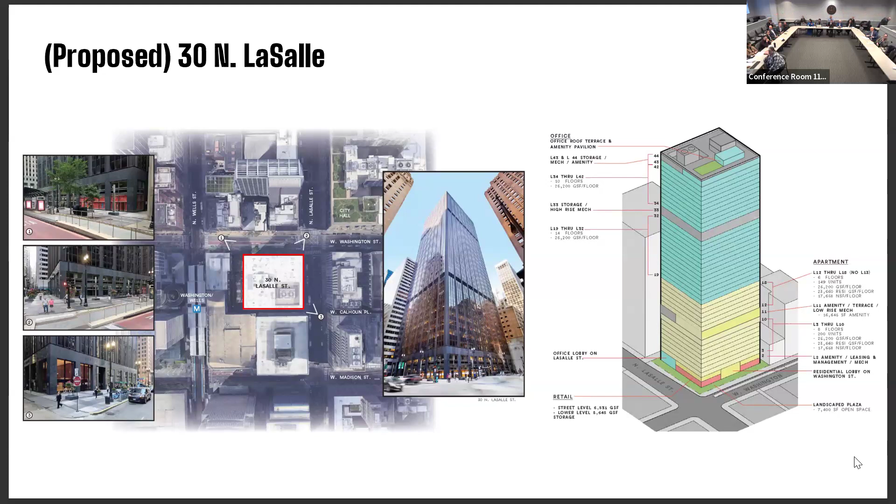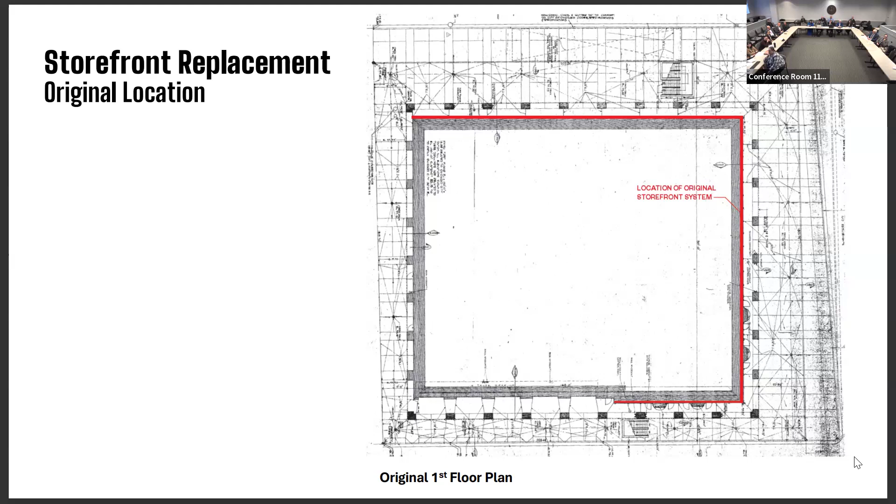The original storefront system was set back behind the exterior column shown here in red. The main entrance to the building was located at the south end of the east elevation and was set within a recessed double height window wall that extends along the southeast corner following the footprint of the main lobby. North of the lobby on the east elevation and along the north elevation, the 2-story openings between the columns have non-historic storefront systems with solid spandrel panels installed in 1989 to conceal the floor structure on the 2nd floor.

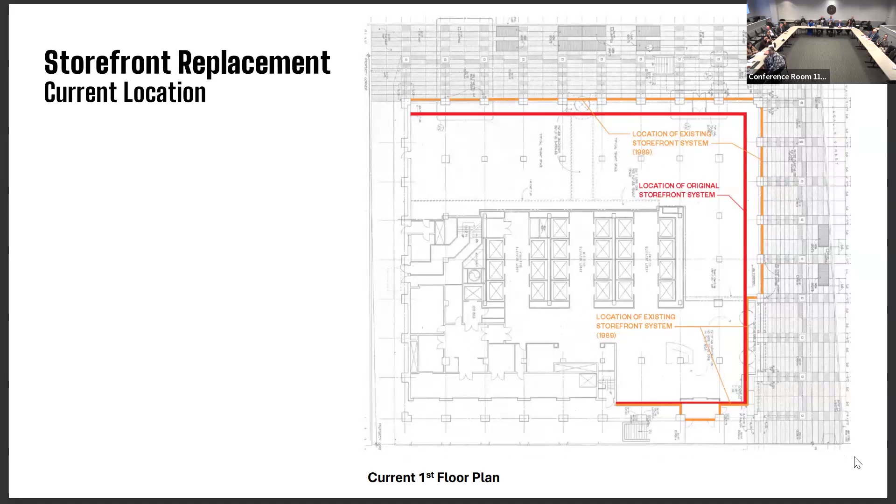So here you can see the historic storefronts that were removed in 1989 in that renovation and were replaced with the storefronts that exist today, shown in orange. They align with the outside face of the columns.

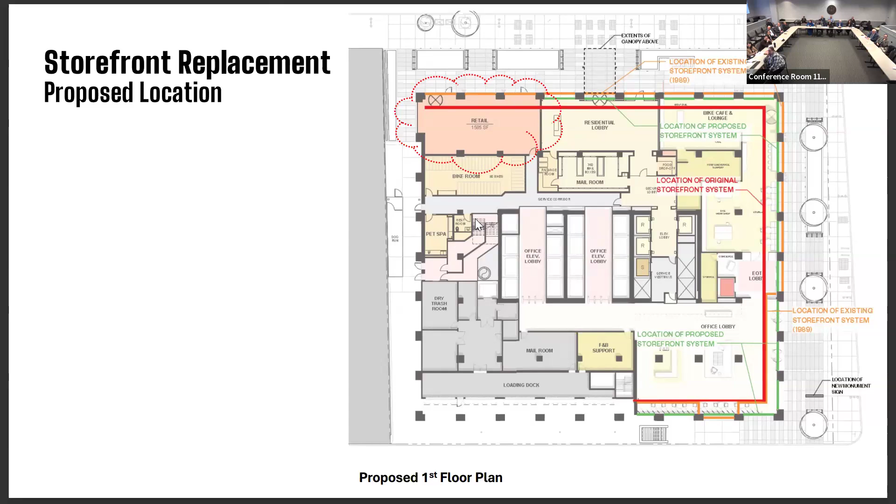The proposed mullion spacing is similar to the original storefront pattern, which consisted of 2 vertical mullions and 1 horizontal mullion each bay. The horizontal mullion will be raised to conceal the second floor slab edge, which was extended in the 1989 renovation from its original location that now connects to the back of the ground floor granite columns.

The new storefront finish and profiles will match the original as closely as possible. The storefront glazing will be selected to match the appearance of the original storefront glazing, and any stone damaged during removal of the non-historic storefronts is required to be repaired to match the original condition.

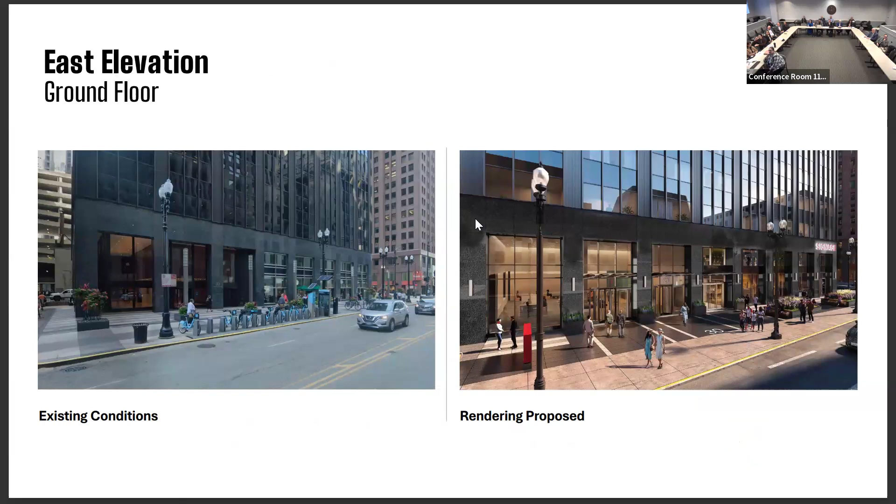I want to note that on this elevation, as previously mentioned, the storefronts were agreed to be replaced to match the historic as closely as possible, so all the storefronts will be consistent in appearance.

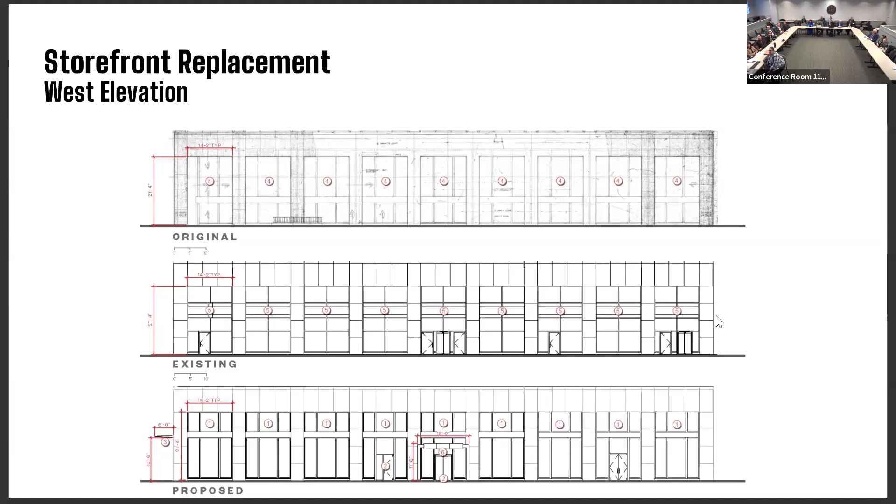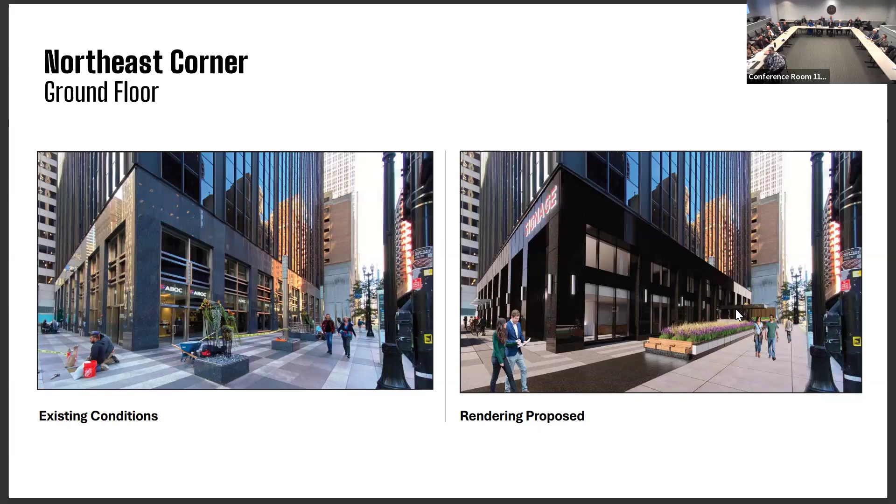The design of the proposed canopies will require a permit review committee review at a future meeting, and large plans, elevations, and section drawings showing the design, size, location, materials, and details of attachment should be submitted when ready.

Above the second floor, all elevations are regularly fenestrated with groups of 3 fixed single-pane windows within each bay. The vision glass in these windows is dark and reflective, and dark spandrel glass divides each floor.

All of the windows are proposed to be removed and replaced to match the color and transparency of the historic windows, and the historic black anodized aluminum mullions and horizontals will remain.

The windows on the upper floors, floors 19 through 44 for office use, will be replaced with new compatible fixed double-paned windows.

To accommodate the proposed residential use, the existing windows on floors 3 through 10 and floors 12 through 18 will be replaced with new compatible double-paned windows that feature a zero-sightline operable awning window in the center opening.

The center window will have the operable panel. It will maintain the existing width and will be 4 feet 2 inches tall, with the remaining 1 foot 9 inches as fixed glazing. The planes of the fixed and operable glazing will be aligned with a silicone joint dividing the two, in a similar color as the tinted glazing, to minimize its appearance and overall impact on the building.

The applicant submitted the historic window details and the proposed window details for a side-by-side comparative analysis. The new window framing at the head and sill is 1 inch taller than the historic framing, and staff recommend approval for the proposed new window, as this difference is slight and will be imperceptible when looking up at the building from street level.

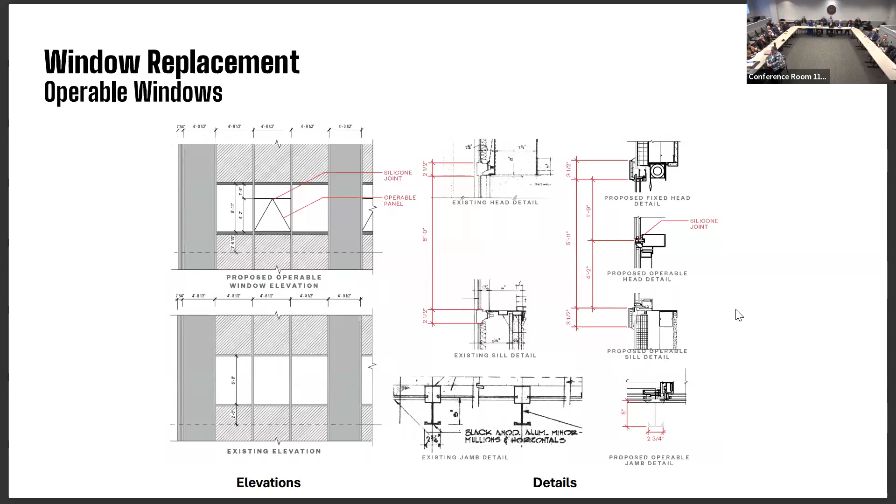The 11th floor, currently a mechanical floor, is proposed to be repurposed as amenity space for residents, providing an outdoor terrace at the perimeter and an interior lounge, fitness, game room, and party room spaces.

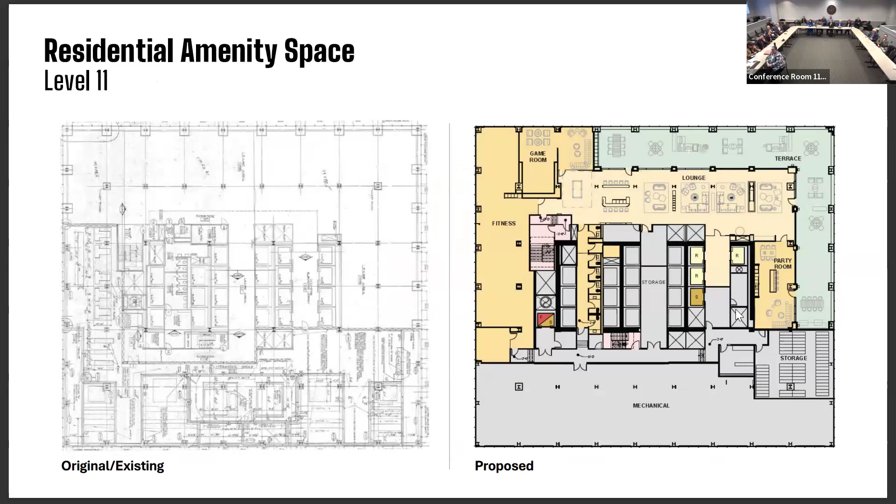The applicant had considered various options on how to treat the exterior of this level, and the final option proposed is to remove the existing louvers to provide an outdoor terrace with new glazed walls set back one bay. Staff recommend approval, as it has limited impact on the overall facade.

Staff further recommend that the ceiling, walls, guardrail, and any fixtures in the space that may be visible from ground level be painted a dark color to match the curtain wall, to minimize its visibility and not distract from the flat, unornamented glass and steel curtain wall.

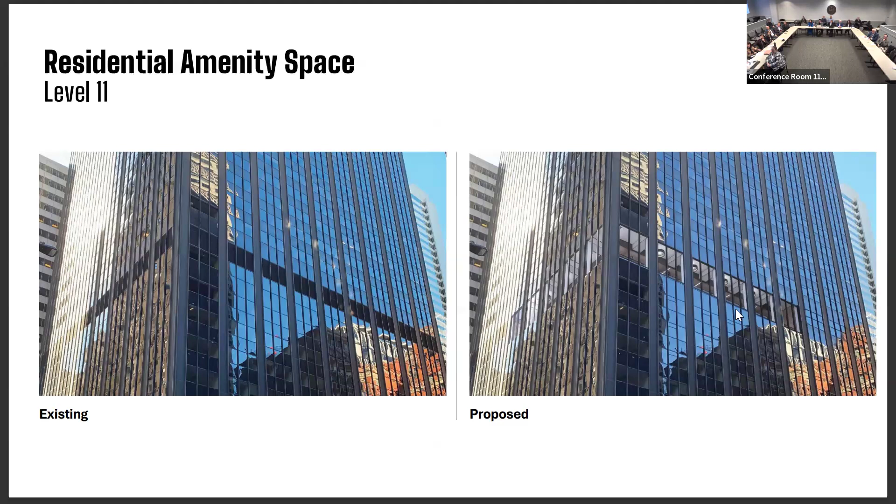The top 2 floors of the building will serve as amenity spaces for the office. The proposed 43rd floor will have lounge and fitness rooms. Currently the 44th floor houses mechanical spaces and has no windows, and is proposed to have new window openings to accommodate a new conference center and a 2-story open space.

The applicant proposes to remove sections of the metal panel system on the north, east, and west elevations of the 44th floor to create these new window openings. A new glass and spandrel curtain wall system will be installed within the new openings to match the existing curtain wall on the lower floors as closely as possible.

The applicant provided 2 options for review, and staff recommends option 1, shown at left with the intermediate horizontal mullion, as it more closely resembles the existing window size and pattern on the floors below.

As part of the new office amenity spaces, a 13-feet tall glass and metal wall enclosure will house a new rooftop cabana and solarium. It will be set back 11 feet from the roof line on the north and west elevations and 77 feet from the east elevation. The existing elevator penthouse will also be expanded to include a 26 feet 4-inch tall elevator overrun enclosure.

This overrun enclosure will be located behind the cabana solarium and is set back 45 feet 9 inches from the south elevation. An elevated roof terrace is proposed to be located just east of the cabana solarium and will be set back 11 feet from the east elevation. A glass windscreen will be installed at the perimeter of the roof terrace and will also be set back 11 feet from the east elevation.

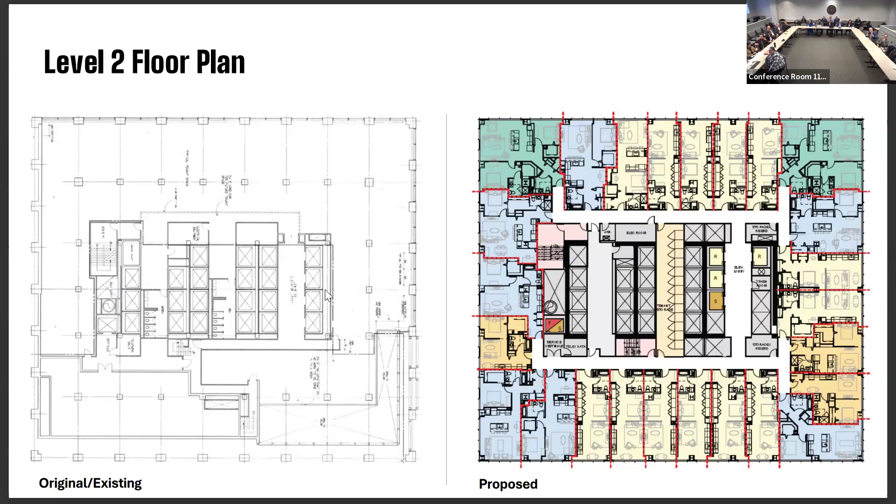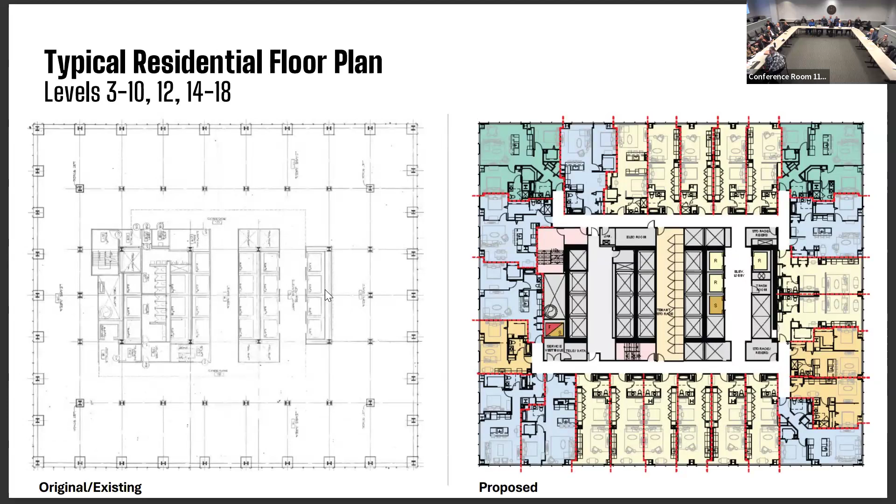Shown here is a typical floor plan for levels 3 through 10, 12, and 14 through 18, which will be used for the new residential units. Staff recommends that the interior walls proposed to jog and terminate at window mullions within the residential and office floors shall be set back to maintain transparency of the windows. Enlarged dimension plan details should be included in the permit drawings for each unique condition for historic preservation staff review.

Staff recommends approval for the project as shown on the drawings dated February 27, 2025, with the modifications and conditions mentioned during this presentation.

I also wanted to reiterate conditions 4 and 5, which are the overall size and general location of the proposed second floor and high-rise signs are approved in concept only. Design, dimensioning, quantity, and height above grade of the signs requires future permit review committee and zoning review. Enlarged dimension elevations, sections, and details shall be submitted for review when developed.

Condition 5, location of the proposed canopies is approved in concept only. Design of the proposed canopies will require permit review committee review at a future meeting. Large plans, elevations, and section drawings showing the design, size, and location, materials, and details of attachments should be submitted when ready.

I also wanted to read section conditions 7 and 8 that were not mentioned during my presentation. Condition 7 is that any original stone damaged during the removal of any of the elements for the glass for the storefronts is required to be repaired to match the original condition. Condition number 8 is the project as proposed may require relief from otherwise applicable zoning requirements pursuant to section 17-14-0202-L. The commission takes no position regarding any requested relief relative to the zoning code requirements.

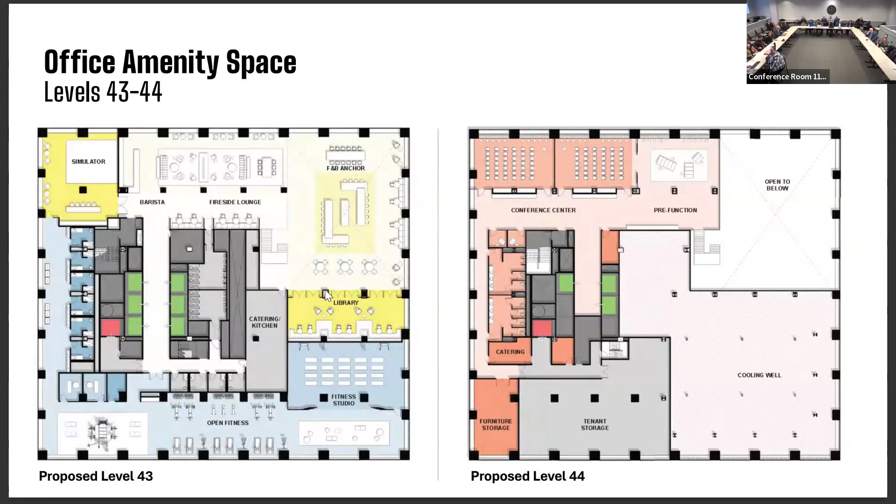Okay, yeah, two options there. So it's this horizontal mullion. On these floors, for these bays here it's like a 2-story open space. And then there's actually a floor here with spandrel glass. So just to continue that line, we thought it'd be appropriate to have that line continue for that 2-story open space, as well as the proportions of the windows kind of following the floors below.

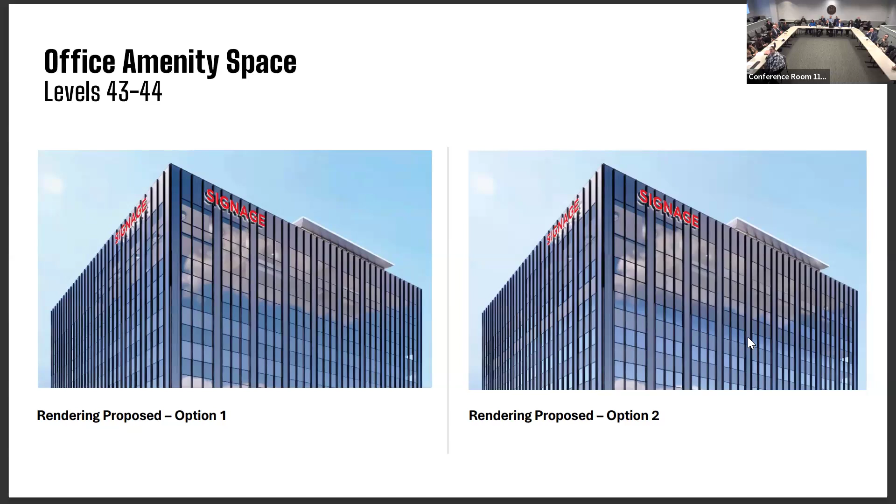Does that make sense? It does. I'm maybe wondering, so I'm just looking at the elevations in the packet we got, particularly for the north end. I totally understand the difference in what the middle line mullion is, but in the drawings we got, it's not showing how that carries over to the north elevation. Do you have the elevation drawing or a comparison between the two in this packet?

So yeah, I think this is the north elevation. Yeah, so this is that. Oh, yeah, you're right, that one doesn't show that horizontal. But the intent is that it carries all the way, right? Yeah, it's supposed to carry all the way. Got it.

And then just, so the hatched area, that's actually gonna be a spandrel? It's spandrel glazing, yeah. Okay, thank you. Any other questions? No. Okay, thank you.

I'd like to hear from the applicant, Mr. Golub and his team. Thank you for having us here today. On behalf of ownership, my name is Lee Golub, principal of Golub & Company.

And at 30 North LaSalle, we've been working on this project for a long time, part of the LaSalle Street TIF, and we've been working with the city planning department on our plan for the residential. We're here today for the Class L status because some of our plans for the residential originally had different moves, and for the Class L designation, we had to redesign what we're doing, mostly the amenity floors.

Downstairs is pretty much the same from a residential standpoint, but as we got into the residential part of the redevelopment, we're now focusing a lot more on the fact that we have 600,000 square feet of office space above. So we're planning a major renovation to the office building as well to attract tenants. We're building tenants right now in the marketplace, and Class L status is important in a pretty competitive marketplace. There are buildings there, and we're in a great location. We believe in everything here, and we're competing against other buildings with Class L and Class A status.

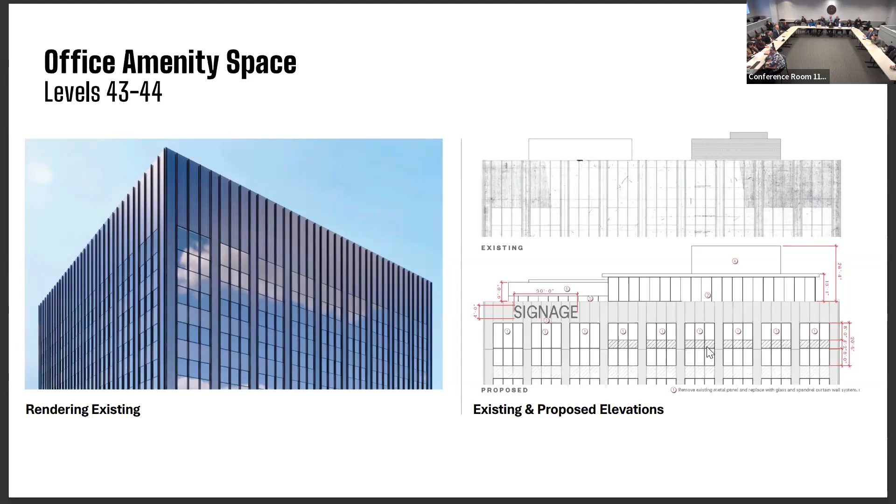Okay, well with that, let's go to the public comment portion of this, and Ms. Kendra Parzen has started to speak. Thank you, right behind you.

My name is Kendra Parzen. I'm the Chicago Area Advocacy Manager for Landmarks Illinois. My organization has a bit of a fraught history with this building.

The formation of Landmarks Illinois was inspired by the 1972 demolition of Adler and Sullivan's Chicago Stock Exchange building at the same location. Widely considered an architectural masterpiece, it was demolished to enable the construction of this building. It also led to the death of Richard Nickel, who was tragically killed while salvaging materials from the Stock Exchange building. Since our founding, the fight to preserve the Chicago Stock Exchange has remained a part of our identity, and the Stock Exchange arch has been included in every iteration of our logo.

However, our organization also places a high value on the sustainable practice of reusing existing buildings. One of our guiding principles is to promote the role of preservation in confronting climate change. We're particularly supportive of efforts to adapt existing buildings for housing, a critical practice as our country faces an undersupply of housing at all levels. Therefore, despite our complicated history with this building, we are supportive of this project to adaptively reuse it.

We thank the team behind the project for the opportunity to review their design in advance of the meeting, and we understand the staff has been working closely with the design team regarding details and their expertise in negotiation, so no comments on that front. But thank you for the opportunity to share our comments. Thank you very much for your comments.

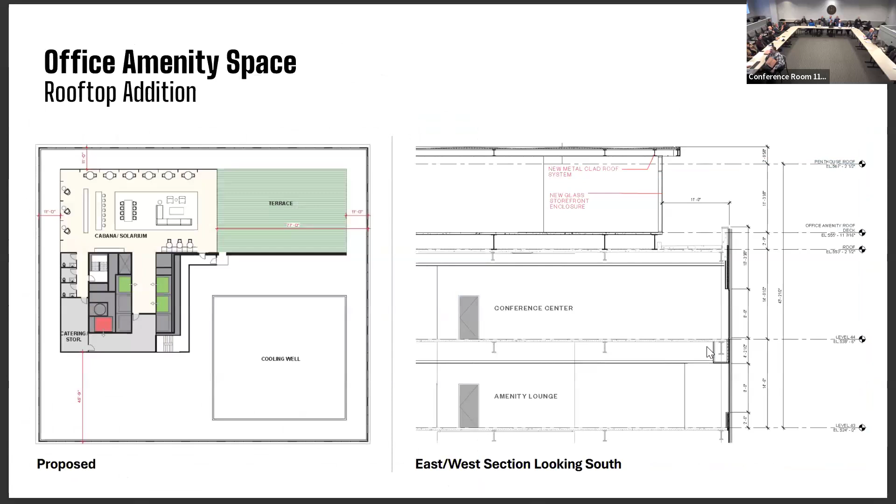That's approximate. This is a detail commonly used in a lot of buildings where you want the window's operable portion to blend in. Particularly in this instance, since it's a gray tinted glass, even the renderings show it, but it won't be obvious. Within the context of what we're trying to accomplish, our objective is to make this as seamless as possible.

Thank you. I think there are some really nice moves in that design, definitely at the base - a tremendous improvement. The little outdoor area working within the skeleton is really nice. Looking forward to that.

I had a question on Class L, just for my own sake - when you do a building with multiple uses, does the residential portion have to be partitioned out? Will they have multiple parcels established? Yes.

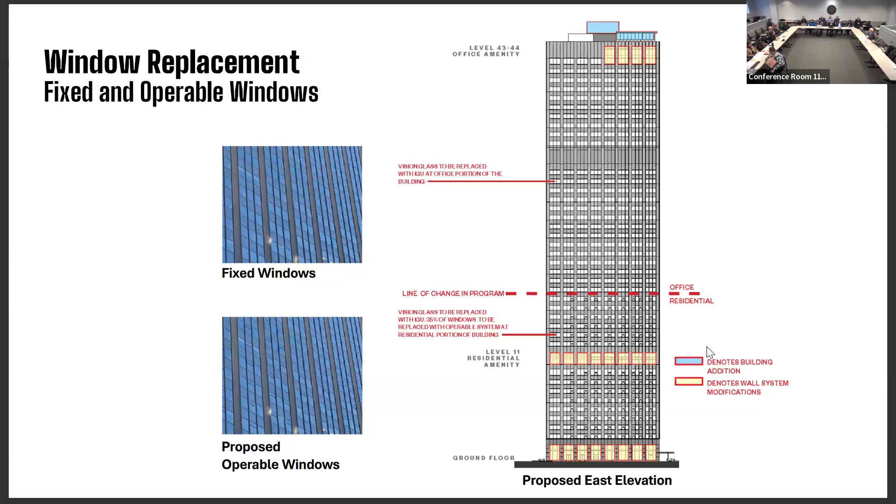Okay, with that, no further discussion. I'd like to request a motion to adopt the staff recommendation. So moved by Commissioner Ponce. Do I have a second? Second, seconded by Commissioner Fair. Commissioner Rubin? Yes. Yes, I'm a yes. Motion carries unanimously. Thank you so much. Congratulations. Thank you very much.

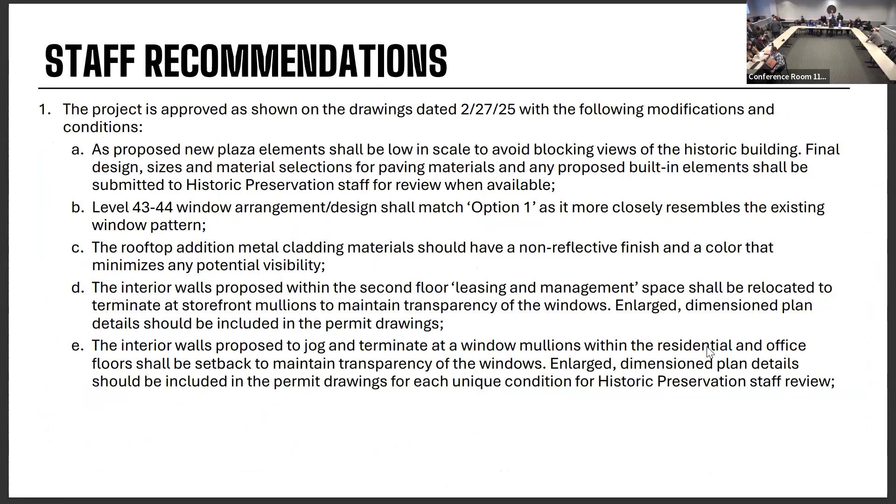Our next project, item number 2, 1816 North Lincoln, 43rd Ward, Old Town Triangle District. The proposed removal of an existing rooftop deck constructed without a permit in 2010 and replacement with a new modified deck.

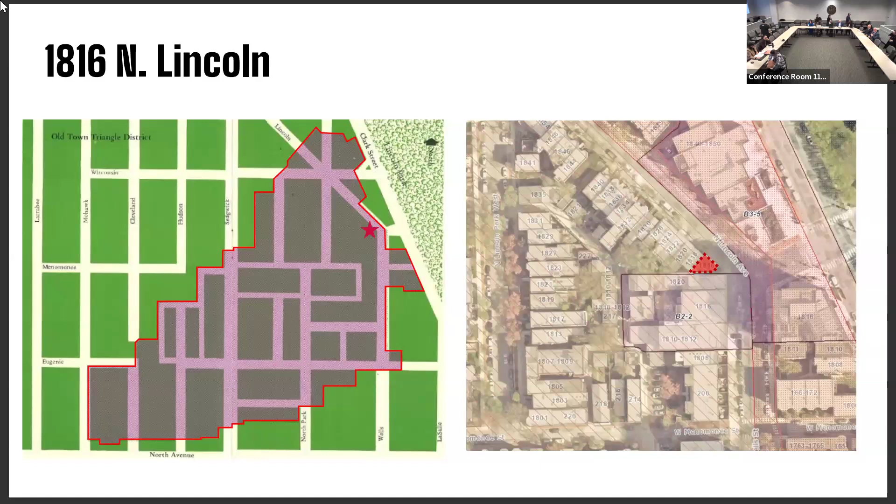Emily Barton has a question. Yes, thank you. The subject property is located mid-block at the intersection of Wells Street and Lincoln Avenue, at the edge of the Old Town Triangle District. The building, constructed in the 1870s, is considered contributing to the district.

Per the applicant, an existing roof deck on the property was installed without a permit around 10 years ago. After receiving a violation citation from the Department of Buildings, the property owner reached out to historic preservation staff to discuss modifying the deck to bring it into compliance with the commission's guidelines and standards.

The rooftop is unusually shaped and smaller than many others in the district. The existing deck, highlighted in red on the aerial, is located at the center of the roof, with the most visible railings approximately 9 feet from the front facade parapet. It's currently approximately 13 feet by 12 feet, 160 square feet in area. The railings are silver with wire horizontal rails.

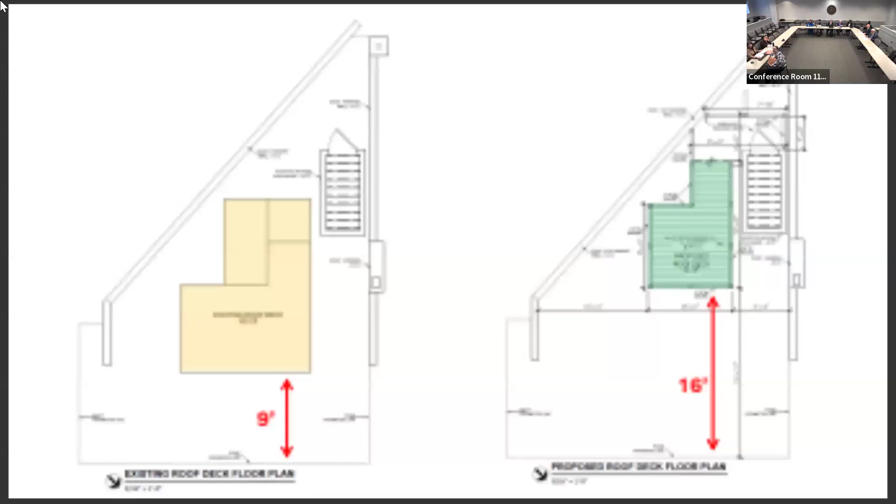The owner is proposing to remove the existing deck and construct a new one that is smaller in size, lowered, and with an increased setback from the front parapet. The new deck will be approximately 8 feet by 12 feet and set back 16 feet from the front parapet wall. It will be constructed at a lower elevation than the existing deck, which is to be removed.

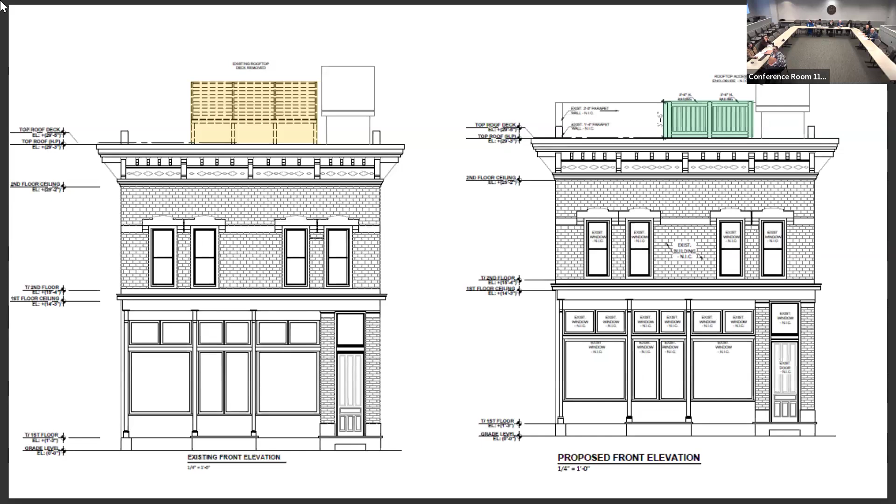Please note that in the proposed elevation, the railings are shown as wood posts. However, the applicant is proposing to reuse the same wire design that the current deck has, and staff recommend that the silver parts be painted a dark, non-reflective finish to further minimize their visibility. A physical mock-up was conducted on January 17th.

You'll notice in all of these that the existing deck is still up, so you'll be able to see that in all of the photos. Any visible elements will again be dark horizontal metal railings, but the area has been highlighted in yellow so you can see it better for convenience.

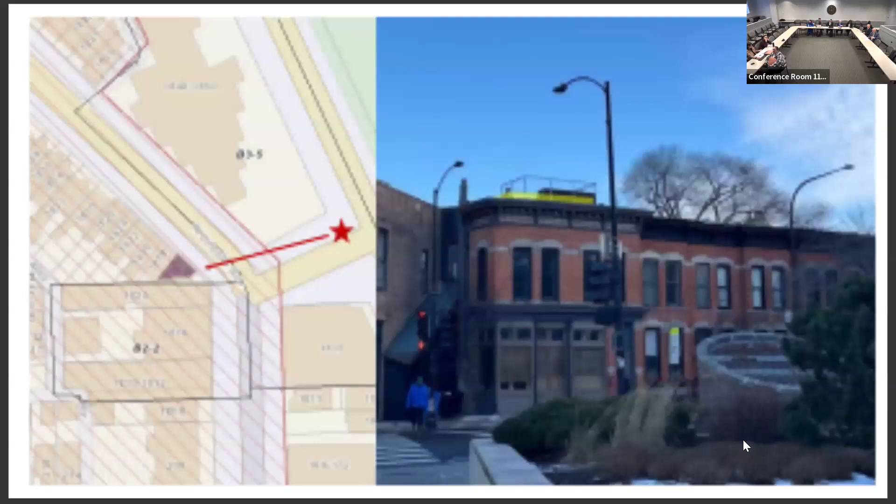So this is from vantage point 1, looking west from the sidewalk across the street. It is just very minimally visible at the top rail there. The deck is more visible from this location, but it is outside the boundary of the landmark district at the corner of Lincoln and Wells.

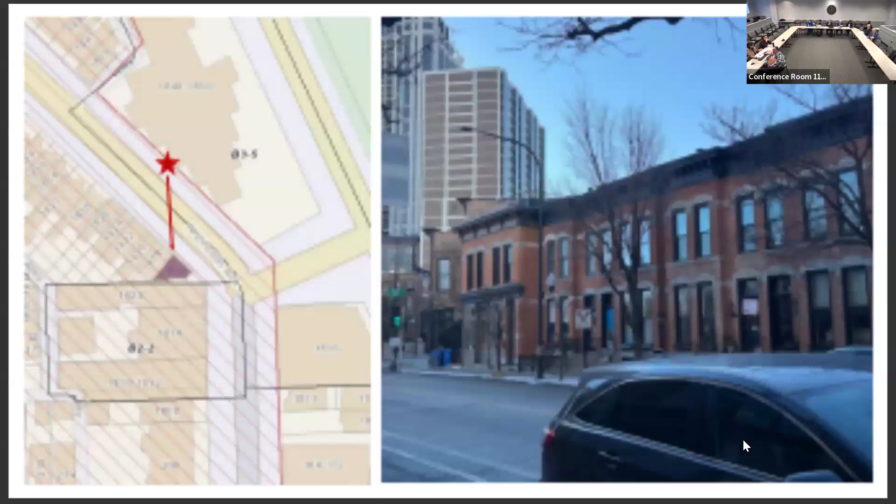The deck is very minimally visible from this location looking south from the opposite side of the street. And it's not visible at all when you go a little bit further up Lincoln.

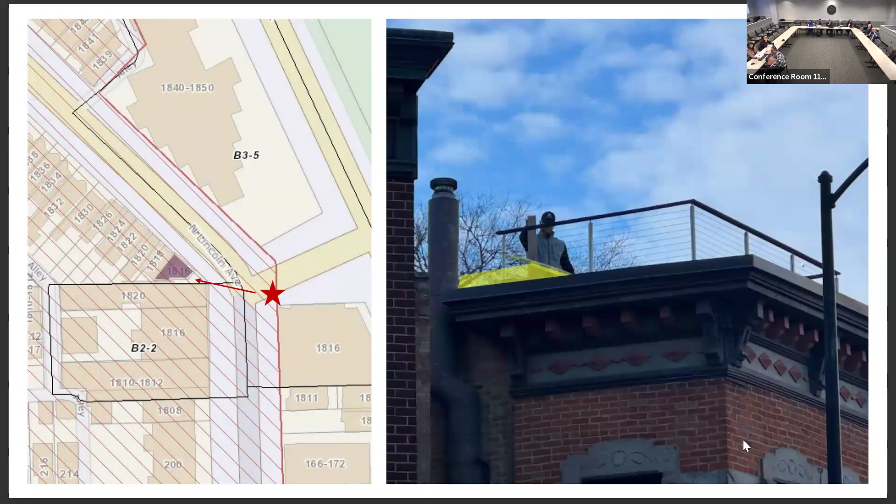So with that said, while the new proposed railings will still be minimally visible on secondary elevations from select vantage points to the south and north, the visibility has been significantly reduced and is comparable to the visibility of other rooftop additions and railings approved in the Old Town Triangle by the committee in the past. Between the limited visibility of the modified deck, the minimal design of the railings, and the unique shape of the roof, staff recommend approval as proposed.

The Old Town Triangle Association and Alderman Knudsen's office have reviewed the proposal, and letters of support from Old Town Triangle Association and an adjacent neighbor were included in your packet. So I'm here if you have any questions, as is the owner.

Right. Thank you, Emily. Commissioners, any questions for Emily before we hear from the owner team? I have one. The deck is very nice.

My question is that you mentioned the sightline from across the street, how that exits the historic district. So effectively, all you have to do is cross the street, and if you can see the deck from there, I haven't thought about it in terms of proximity of leaving the historic district by a matter of feet, how it changes how you would handle this. It's obviously still something we pay attention to. Views within the district are the most important. Those are the ones that we really focus on. But yes, it is a weird little half street there. Okay. But again, we feel it is, even in that, you'll only see a couple horizontal rails.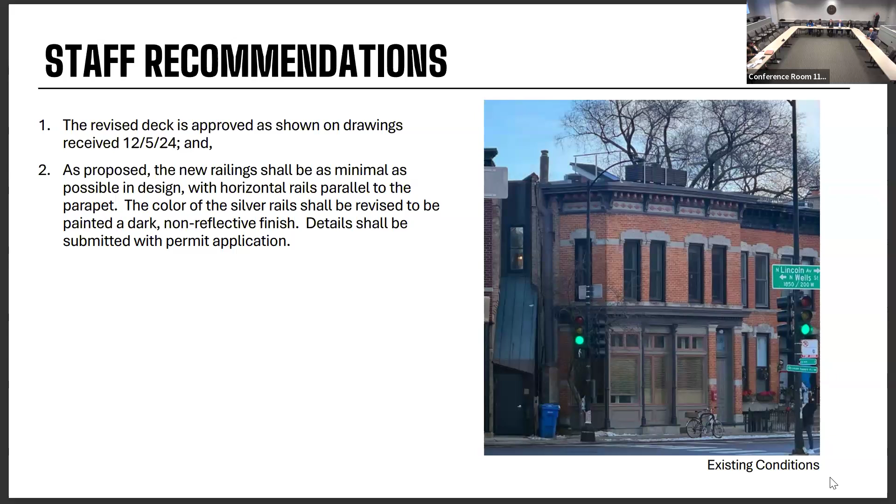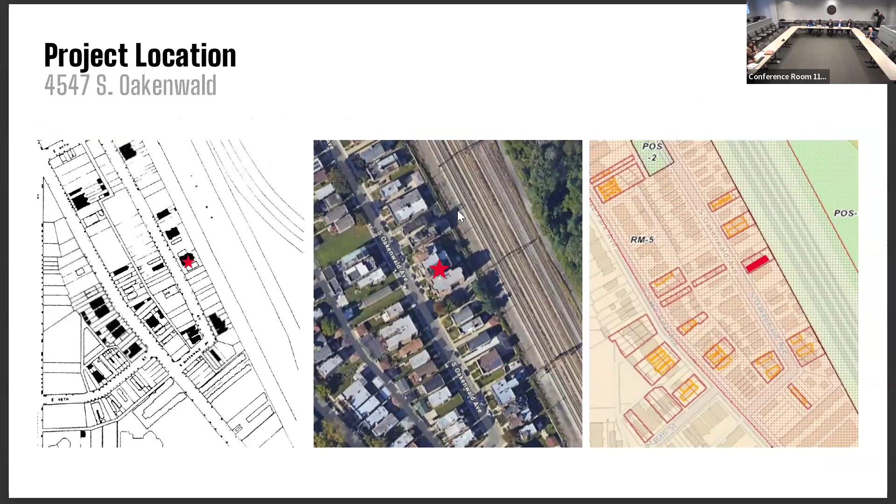Yes, thank you, Chairman. This is for 4547 South Oakenwald. The subject property is a 3-story brick and sandstone building, part of the North Kenwood Multiple Resource District, located mid-block on the east side of Oakenwald between 44th Place to the north and South Lake Park to the south. It is this building right in the center. It shares a party wall with its neighbor to the north, which was likely built at the same time.

The historic sandstone facade is severely deteriorated, with some units cracked, spalling, eroded, and some units missing entirely. At some point a parge coat was also added over the stone above the porch on the section of wall containing the two arched windows, as well as on the face of the dormer within the mansard roof above.

To address the condition issues, the applicants are proposing to restore the facade using a combination of replaced units, restored units, and units repaired using a restoration mortar. On this facade drawing provided by the mason, the units to be replaced entirely are identified in pink.

The new units are proposed to be Berea, Ohio sandstone. Some of the units identified in light yellow are proposed to be cleaned with any loose or flaking stone removed. The remaining units, color-coded orange, are proposed to be repaired using a mineral-based restoration mortar. The concrete parge coat is shown in blue.

The condition of the stone beneath the parge coat is not known. When the parge coat is carefully removed, the condition of the stone will be assessed and the appropriate repair methods determined. In addition to the work on the stone, all mortar joints are proposed to be tuck-pointed.

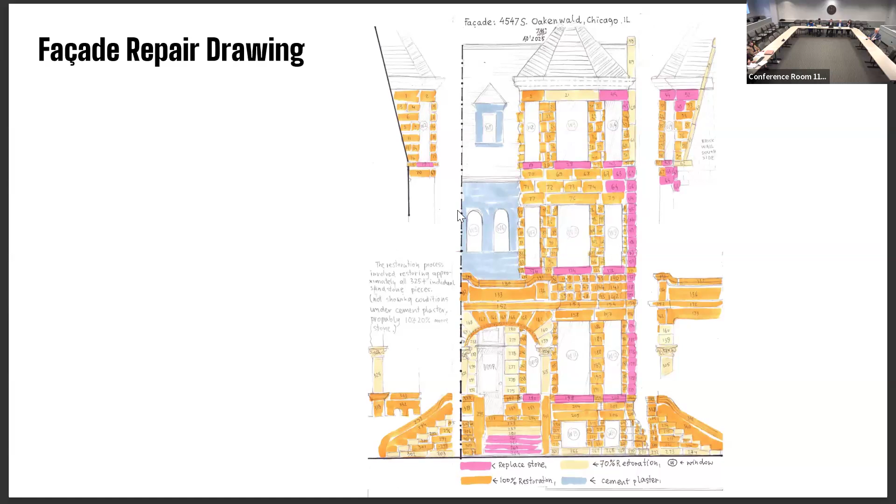The product proposed to restore some of the damaged stone is a mineral-based repair mortar called Reconstec 200, specifically formulated for use with natural sandstone. Staff contacted the manufacturer, Sika Canada, to confirm this is an appropriate material for the proposed application. They confirmed that if applied in layers according to the manufacturer instructions, this is an appropriate application.

Staff also confirmed that the application method noted in the scope of work matches the manufacturer's application instructions. The proposed work will restore the historic facade while retaining as much of the original stone as possible, and staff recommends approval with these conditions.

So the conditions are confirming what I just presented, a site visit to confirm the condition of the stone beneath the non-historic parge coat, and conditions related to matching the color, texture, shape, etc. for both the stone units, the new stone, the repair mortar, and the mortar joints.

So you can see the new mortar joint should match the size of existing joints, and the color should be a natural color without pigment.

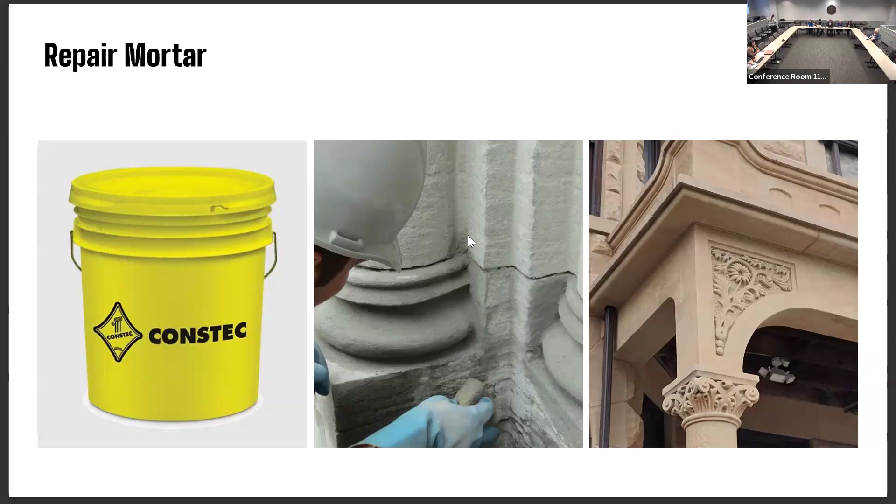If there are none, I'd like to request a motion to adopt the modified staff recommendation. Did you want to see another site? Can we pull the staff recommendations up?

You've got the two visits already that you mentioned, I think. If it needs to be stipulated here, it's just wanting to see the product applied in both the 70% and the 100% restoration condition. So essentially they should give you a few sample locations where they mocked it up.

With that amendment, I guess a modified motion on the table. Sounds like what I would do too. That's a second by Commissioner Rubin. Seconded. Commissioner Ponce? Yeah, I'm a yes. Motion carries unanimously, so thank you.

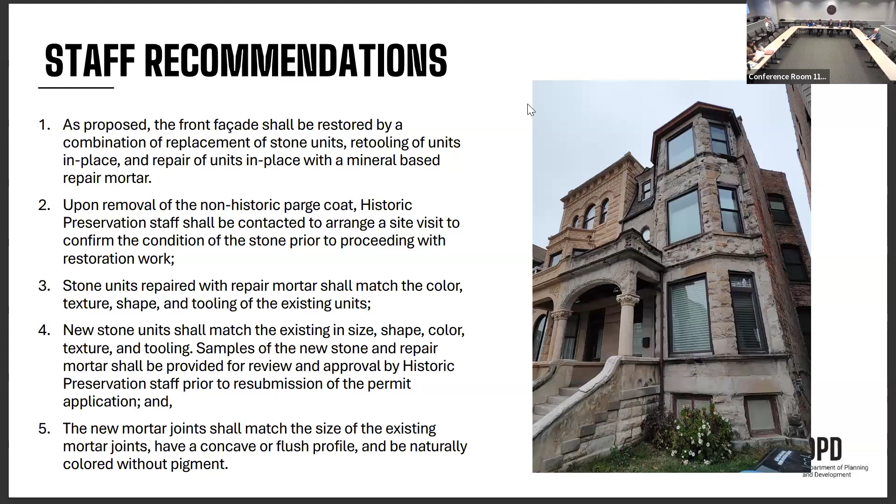All right, moving on to item number 4, final item, 2019 West Cortez, First Ward, Ukrainian Village District. The proposed interior and exterior rehabilitation of existing 4-unit building into a 2-unit building, including modification of the west elevation, new side additions, and a new rear garage. I'd like to call Emily Barton for the presentation.

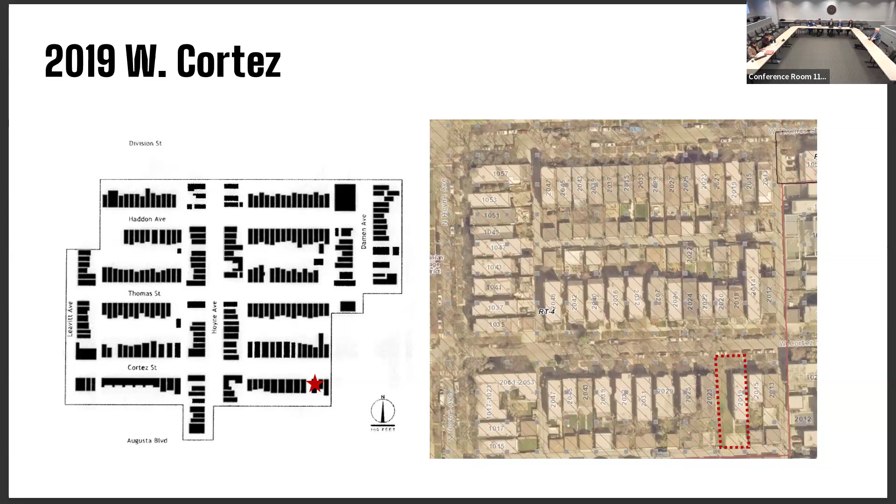Thank you, Chairman. This subject property is located mid-block between Damen Avenue and Hoyne Avenue. It's a 2-story masonry building with 4 dwelling units. The current owners propose to convert the building to house 2 units, with a basement apartment and a residence they will live in on the upper 2 floors. Staff received a permit application for this in January, and because the scope includes visible side additions, it is being referred to the ARC.

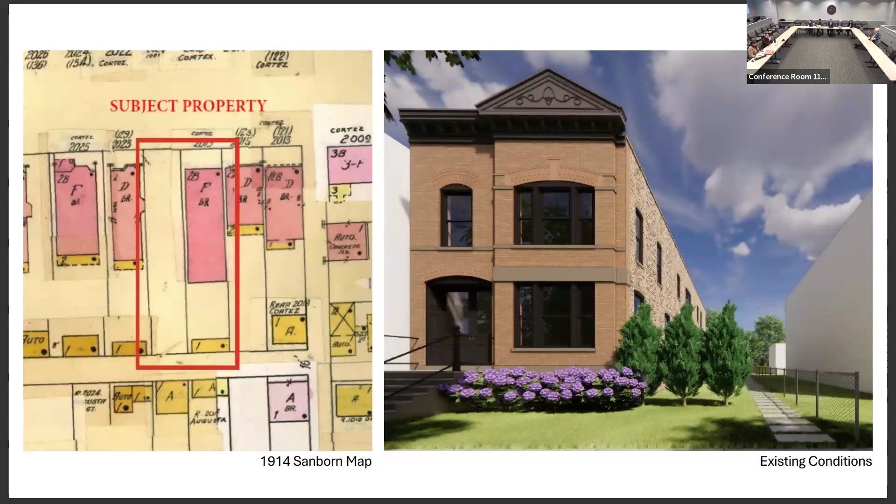The historic building is located on a 38-foot wide by 125-foot deep lot. This is an unusual characteristic in the district, which typically features 25-foot wide lots with minimal side yards. The applicant is proposing modifications to the west side elevation, which has a side yard of approximately 16.5 feet. Historically, this side yard has been empty and is shown vacant as early as the 1914 Sanborn map, but because of this, any modifications will be visible from the street.

All the masonry openings on the west elevation are proposed to be modified and new windows installed to accommodate their interior layout, shown in red. The new windows are proposed to be double hung and similar in size to the existing non-historic windows, and will feature the same arched masonry headers and stone sills as existing.

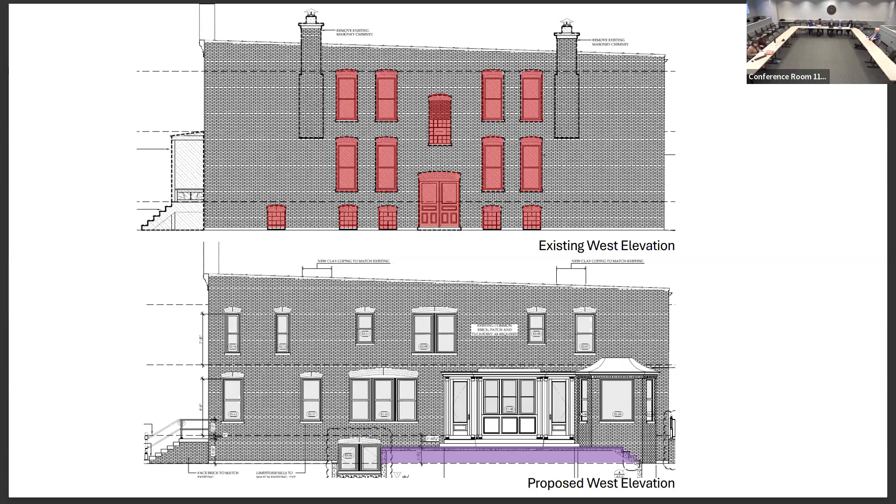The existing double door is proposed to be removed and a new light well will be added for the basement unit. From this light well towards the south, a new raised stone porch is proposed to accommodate the new entrances incorporated into the new additions, highlighted in purple. All new infill masonry required will be common brick to match the existing conditions.

So there are 2 new side additions being proposed towards the rear of the property. The first is 8.5 feet in length and will extend out only about 3 feet from the existing west wall. This addition will be set back approximately 43 feet from the front facade and is proposed to be clad in cementitious panels in a dark tone with clear vision glass glazing.

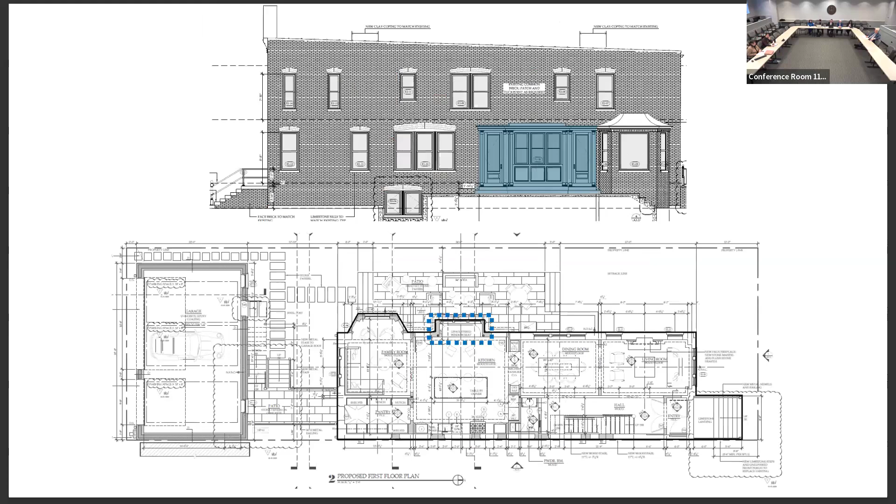As proposed, this bay is quite ornamental, and for it to better respect the existing building and not be confused potentially as an original feature, staff recommends the design be simplified by removing those ornamental columns.

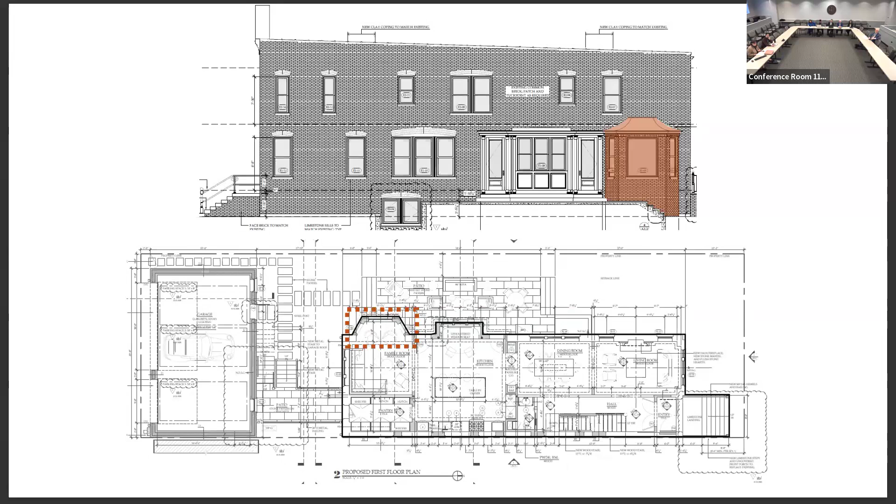The second addition is located behind the first and is simpler in design. It is proposed to be set back approximately 55 feet 8 inches from the front facade and about 5 feet from the south end of that first addition. This one will be partially obscured by the first one, and it is proposed to be clad in common brick, matching the remainder of the elevation. It will project 4 feet out into the side yard and features a curved slope roof.

Per the architect, this design is best for water shedding, and if simplified to a straight line, would need to be taller, increasing visibility.

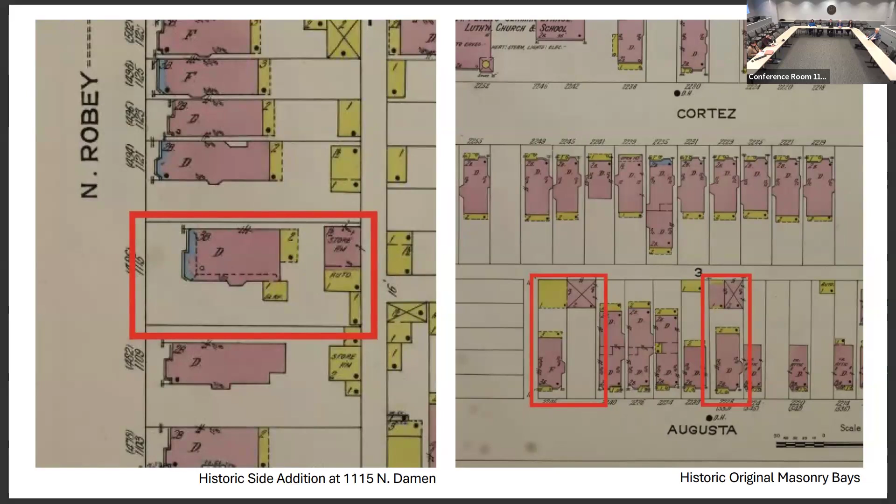There is some precedent for side additions in the district, including at 1115 North Damen, which features a side addition as early as 1914. Many other buildings in the district feature historic original masonry bays that project into the side yard. The additions are minimal in design and projection and are set back as far as possible to reduce their visibility. Staff recommends approval as proposed, providing the detailing of the first addition closest to the street be simplified by removing the columns. And then any removed masonry should be salvaged and reinstalled where possible, with any new masonry to match Chicago common brick.

At the rear of the property, there's currently a concrete parking pad which accommodates 4 vehicles. The applicant is proposing to construct a new garage in its place. This garage would also be clad in Chicago common brick, matching the side and rear elevations of the main house. It's about 15 feet in height with a roof deck on top.

In order to accommodate 3 cars, 2 for the main unit and 1 for the new basement unit, the garage is proposed to be 35 feet in length, extending almost the entire width of the lot. Because of this, the garage will also be visible from Cortez Street.

Most properties in the district have the smaller lots as I discussed, with garages similarly spanning their entire width. However, because of the minimal side yards, these are rarely visible from the street. There is also, however, historic precedent for wider garages in the district. And because of these historic examples, the minimal design of the new garage and the significant setback, staff recommend approval as proposed.

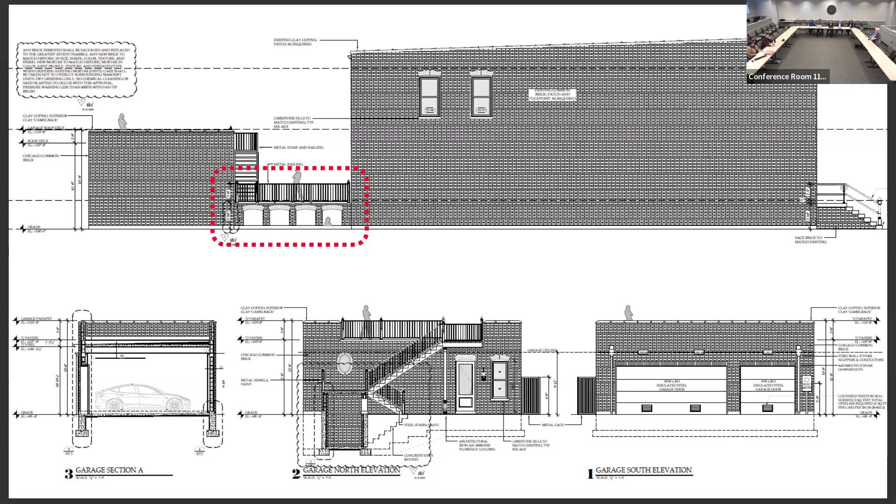The existing non-historic canopy over the porch is proposed to be removed along with the non-historic steps and railings. The new railings are proposed to be pipe rail with newel posts and new limestone steps.

Front doors are likely original to the house and were proposed to be replaced. After discussions with staff, the doors are now suggested to be refinished and reinstalled. The operation of the western door will be flipped in order to mirror the other one as a traditional double door would, with the door to the east being fixed in place and the basement unit being accessed from the rear and the side. This will maintain the historic doors and, more importantly, the historic trim there in the middle.

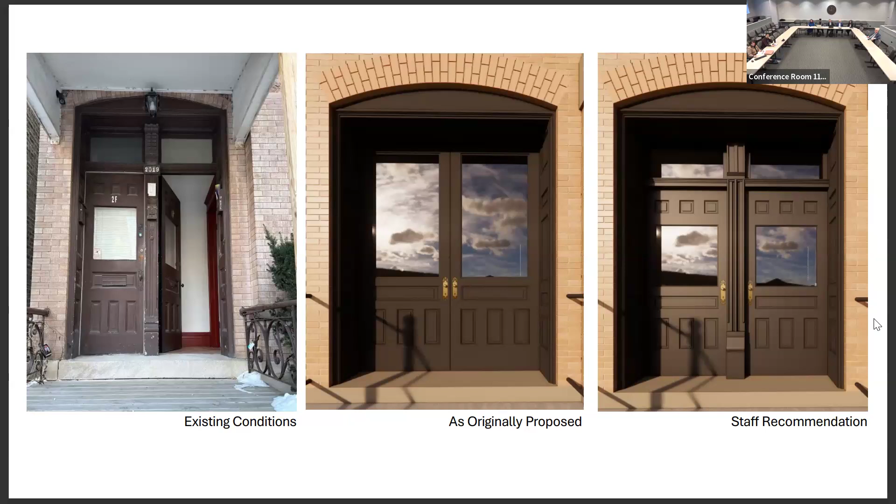And staff recommend approval. In addition to the windows on the west elevation, the remainder of the building's non-historic windows and aluminum panning will be removed and replaced with new aluminum clad wood windows with appropriate profiles. Staff recommend approval of this scope as proposed with the condition that the permit drawings be revised to show the reuse of the doors. There are two chimneys on the west elevation of the building.

They are no longer functional and are in disrepair. The applicant's proposing to remove them both as they no longer serve a purpose for the house. They're very simple in design and constructed of common brick with some non-historic repairs at the top, made in the past with very minimal corbelling at the bottom.

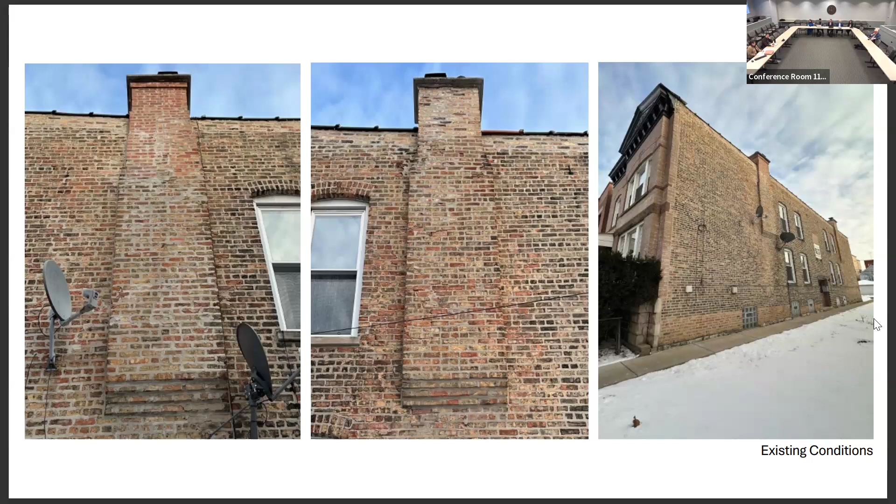And they are visible from the street due to their wide side yard. However, the applicants provided a letter from their mason explaining that the chimneys show significant signs of erosion and cracking and recommending their removal. So while likely original to the house, they are no longer functional, not decorative in design, and in disrepair, and staff recommends that their removal will not be an adverse effect.

So with that said, the project is approved as shown on the permit drawings with the following modifications: the front elevation be revised to show the existing doors being retained, and the northernmost side addition be revised to remove the decorative columns. And again, as always, any new masonry or mortar shall match the existing conditions.

The Ukrainian Village Neighbors Association and Alderman La Spata's office were contacted. They're aware of the proposal, but no formal comments have been received. So if you have questions for me, we also have the architect and ownership here.

Thank you, Emily. Commissioners, any questions for Emily before we hear from you? Seeing none, let's hear from the ownership team and the project architect.

It dates back to 1898. It's currently a 4-flat that they're renting, and it's in quite a state of disrepair, as you've seen from the photos. This has been really a labor of love. We've been working with them since the end of 2022. They're really pouring their hearts into the project. We're really, really excited for their family who intends to live here as their long-term house, and they're putting a huge investment into the property.